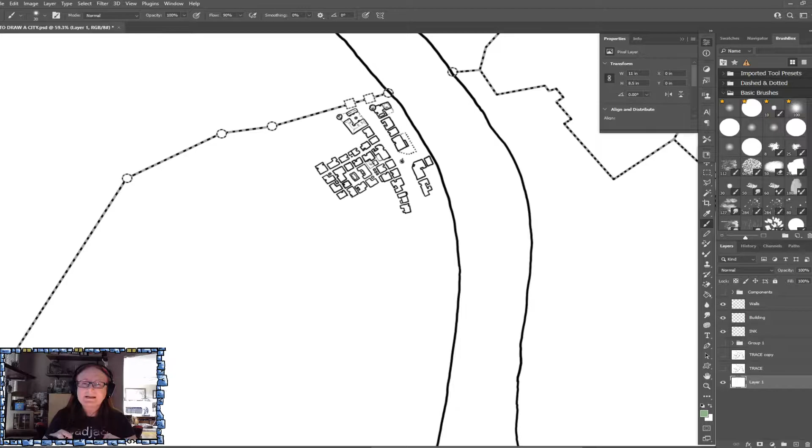And what I mean by road guidelines is something like this. Even if you're doing ink on paper, and I did for many, many years, you want to mark out where your roads are going to be. Your main roads, your secondary and your tertiary roads, right? You don't need to get every single one. You don't need to get every single alleyway. But you are giving a broad brushstroke, and think about it this way, reserving space, that negative space, for where there won't be buildings. And where there aren't buildings, there's a road, right?

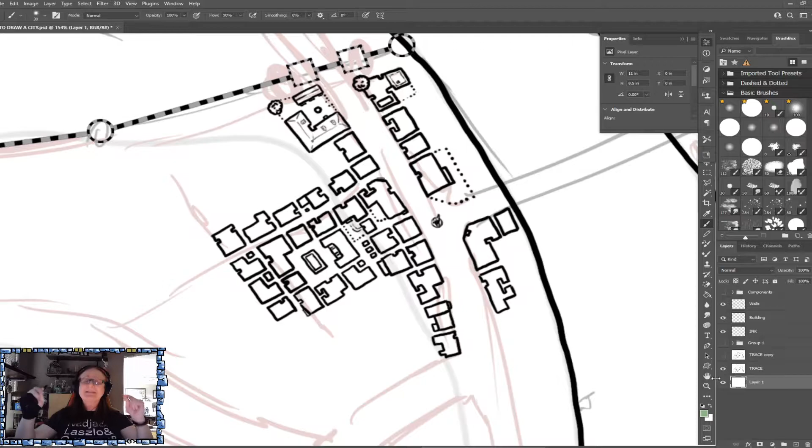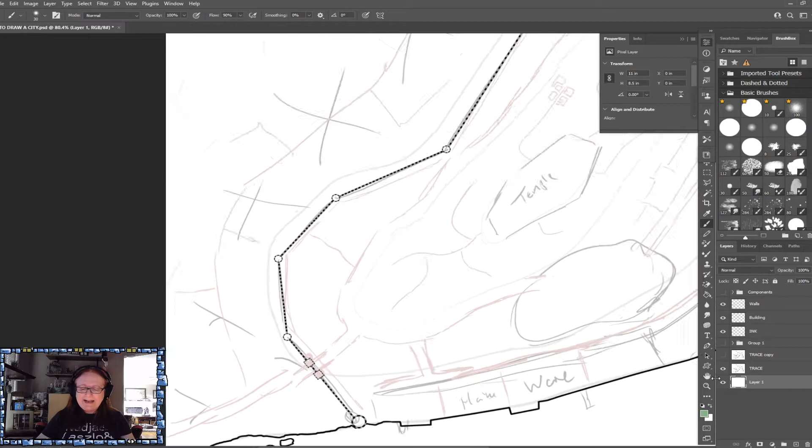And we obviously have a very clear main road coming through here, kind of following the river's edge, and then it's going to hit the warehouse area, which we're going to come back to in a moment. The warehouse area joins an actual marketplace, it then joins an inner road, let's call it like a ring road, and the outer gate there. In between the two, and it looks a little bit like a mess or a flying spaghetti monster, but I have drawn these, I'm going to call them single line neighborhood sort of districts, right?

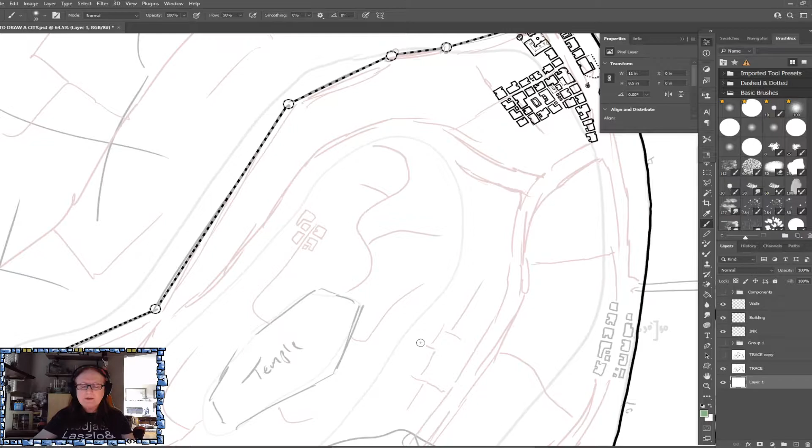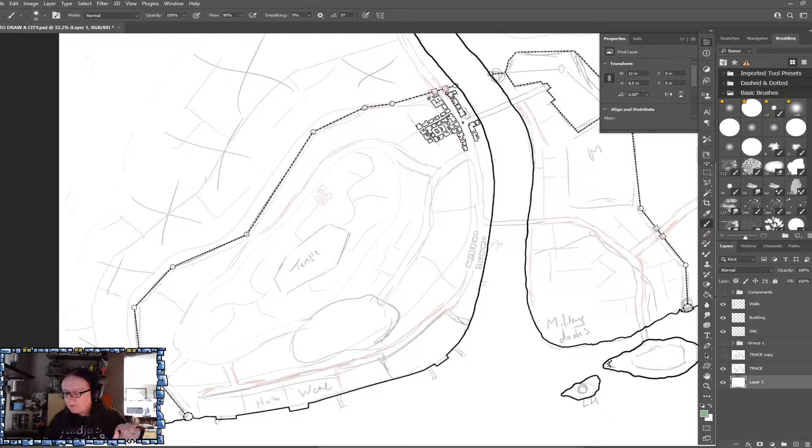And following here and here, and all of these, I'm intending to draw buildings on either side of these single lines. And by doing that, I create districts. I create clusters and neighborhoods. Let's call them clusters, building clusters. And everywhere else in between them, we've obviously got our secondary and our tertiary roads. But there are two ways of going about that. And I quickly want to share with you the second way that I used to do, honestly, for about 20 years. And brace yourself, because this is going to seem kind of crazy.

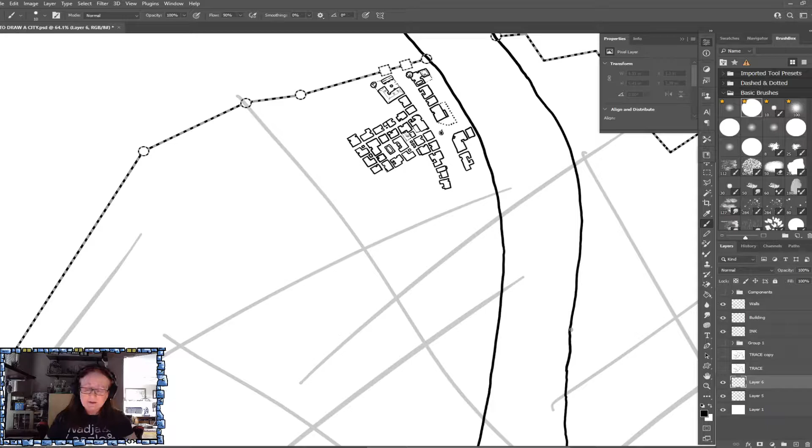Something like this. Do it with a pencil. In fact, let's change ourselves to grey so it feels more pencil-like. Where are my secondary roads going to be? That. Now that may seem utterly ridiculous. Let's drop a little opacity onto it. But look what happens if I start to draw buildings either side of that chaos. Now remember, these represent one side of the road.

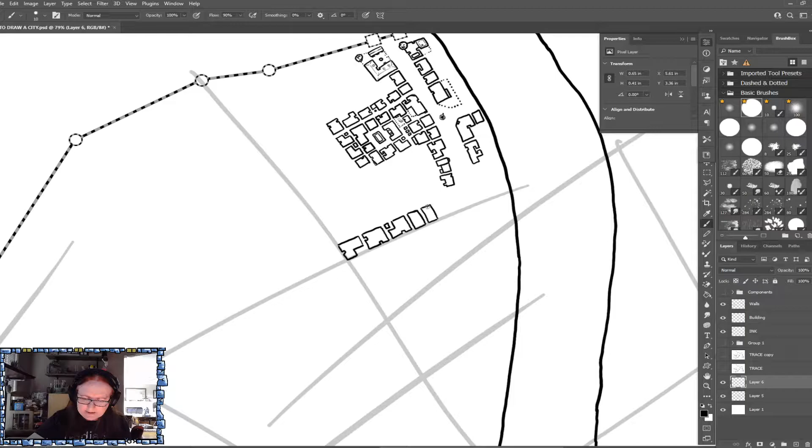Now, I'm not going to talk about shapes right now, but pay attention to the type of thing that I'm doing to create variety. So no two shapes are the same next to each other. In fact, you could even do something like this. And then a little bit of roof detail. Voila, different shape. But I'm going to flip to the other side. And I'm leaving a gap.

I love doing that little notch approach, by the way. It's a great way to take what is basically like a square or a rectangle, and then notch it. And it comes across almost like it's a little doorway or something, right? Take it one stage further. And you've just created, what, like a yard? Maybe a garden area? Opportunities for adding a little fence around the outside.

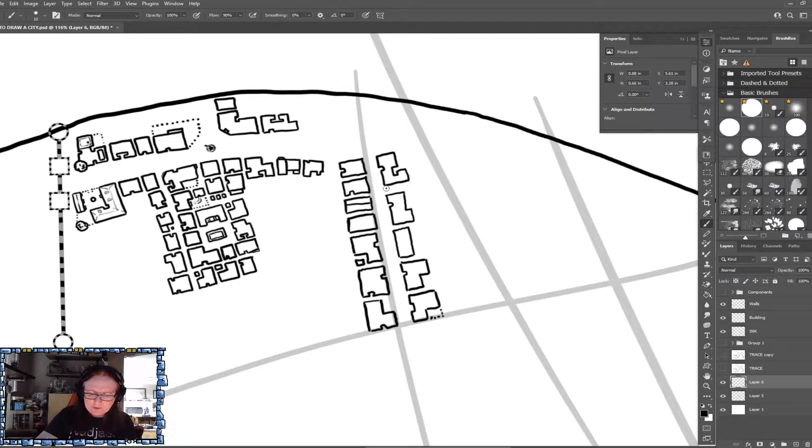Now, this is just to quickly show that drawing those really haphazard, crazy lines can give us a road edge, and therefore a city shape, just as easily, if not easier, than planning them out. In fact, let me do the intersection here. You'll see what I'm saying.

And it's almost like you could give yourself a challenge. Just throw down some random lines in random directions and go. You could do the same city with different random lines and get a completely different feel. That would actually be a cool future project. Maybe a different video, huh?

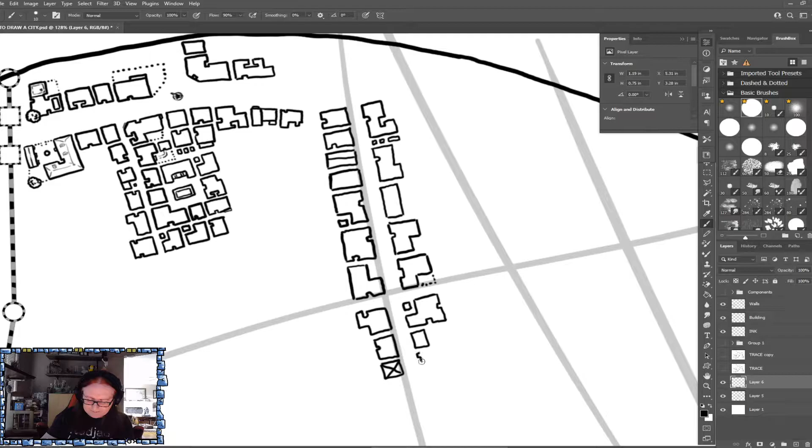Alright, I'm doing this quickly. We're going to be erasing all of this. But I just want to demonstrate that right there, just by using those crazy, crazy, random lines of chaos, we can absolutely get our districts marked out.

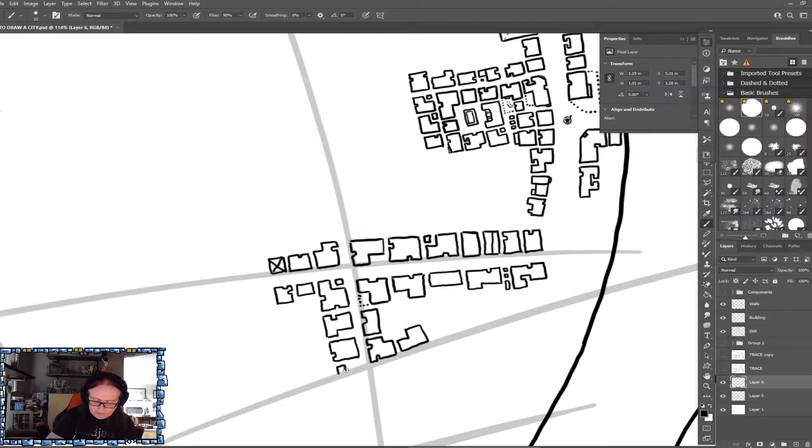And we'll do one more. I'm gonna just do something like that. And that was just some crazy, almost paint splashed across the canvas lines. I could do that all over now. Draw these buildings now all over, and it would look fine.

Particularly if we then combined that, which you should, with marking out certain areas where this is where my temple's going to be. I have a hill here, I have a palace here, I have my warehouses here. Still do those lines, just random directions, even random lengths, and you get this wonderful, wonderful, wonderful look.

Now, let's just hide them for a moment. Let's get back to our city proper. What we're doing is I marked out my main roads, and you should still do that, and I have more purposefully drawn in, well, my secondary roads, and it creates a little bit more of a thought process, but it also allows you to be a little bit more deliberate in maybe I want to take a curved path and bring it up to the top of the hill.

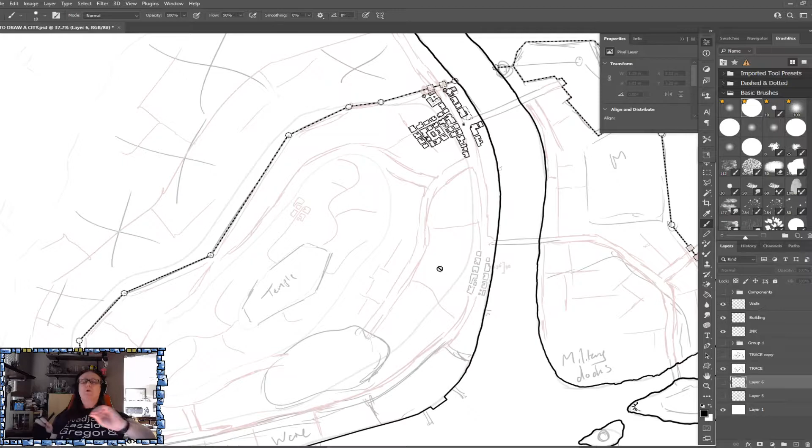I want to ensure that I am connecting between these roads over here. I want to make sure I have a secondary road over there. So it's a lot more deliberate. And therefore it actually can be a little bit more difficult because you kind of almost enter a different sort of mind state, as compared to yeah, let's draw that. But both methods work, and I've used both methods, and I encourage you to.

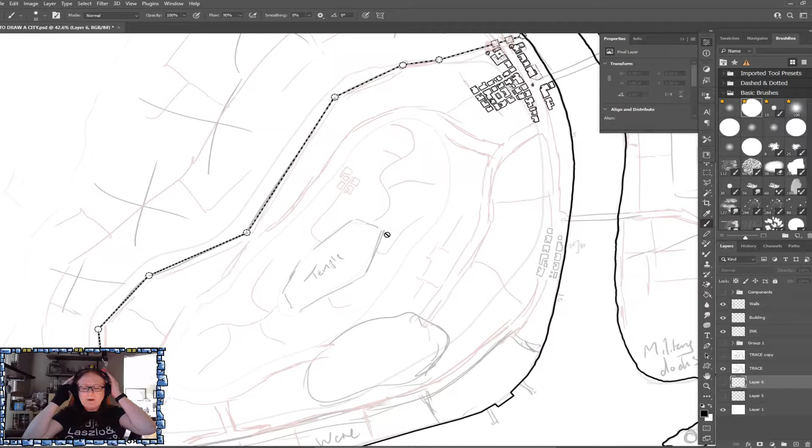You can also do a little bit of a hybrid. Mark off your main roads, mark off your main districts. If there are particular areas that you know that you want to have, and I'll use the path going up towards a temple on the top of the hill, or maybe a road going towards a palace or something, mark them off, and then do the crazy lines all over, and draw. See where it gets you, okay? I promise you, you will get some interesting district shapes, and we'll be talking more about that in a later chapter.

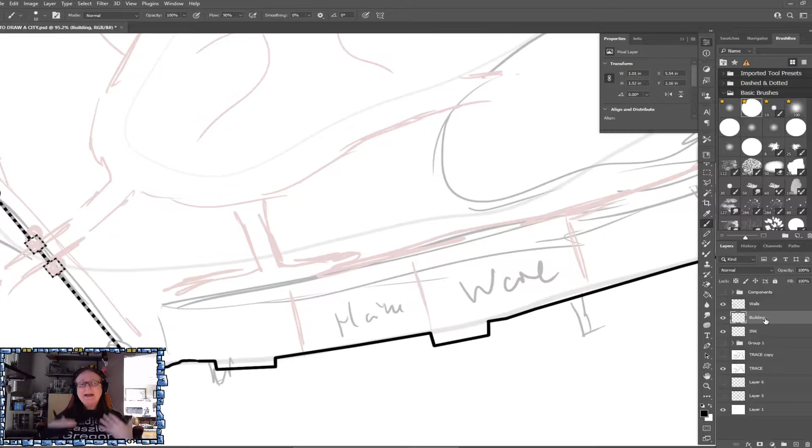First, let's come back to our building layer, and today we're going to talk about warehouses. We're going to start doing a deep dive into particular buildings and how they should differ from other buildings. And to demonstrate this, I'm actually going to do a couple of those other buildings. And we're going to talk then about how I would draw warehouses that make it very obvious. Aside from the fact that we're at some docks here, which we will be drawing in some of those, what is it about a warehouse district that makes it a warehouse district?

Well, to my mind, several things come to thought. First and foremost, obviously, the time period we're in is going to come into play. If I'm drawing in the docks of the River Thames, let's say around a gaslight sort of period, I'm going to get that almost industrial feel going on. I'm definitely going to have some cranes, that type of thing. Maybe some train yards coming in. But this is a fantasy city, so I'm going to throttle that back a little bit. But big buildings, right? Big buildings, docks, and maybe, depending, some cranes.

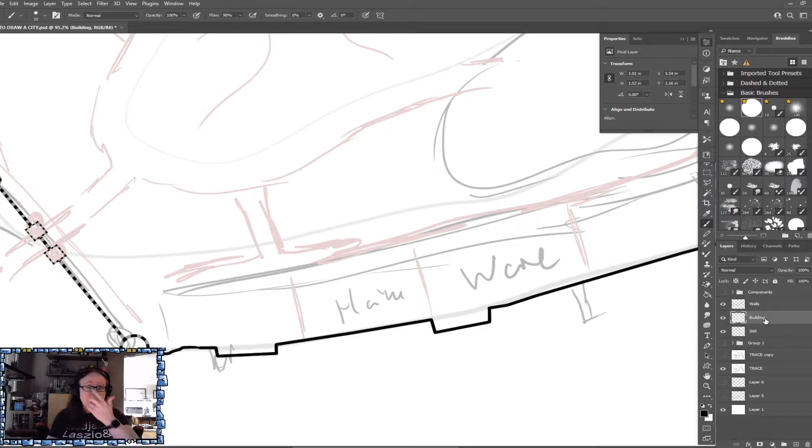Some loading and unloading cranes. So if you think about it, they had them in Roman times. Manually operated, animal operated, or whatever. They definitely had them to aid the loading and unloading process. So I kind of actually like throwing in cranes nowadays on my maps. And I think we're going to show you that.

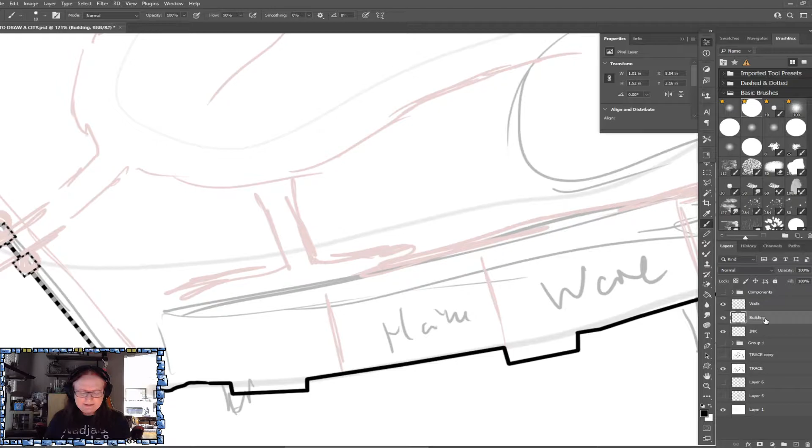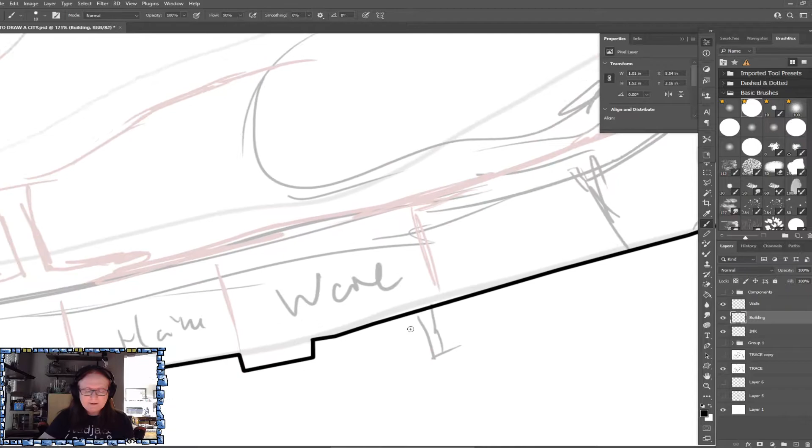But to give some context, this is one of our messy little corners, and at some point I'm actually going to clean up some of these lines where we've drawn in our towers. But I've marked our warehouse district. We know where our docks are going to be. I've already started making our little dock areas. We're going to add some piers. And I've decided that I want this road connecting with this inner road over here. So I'm actually going to draw in a couple of things there to help frame the docks that we're going to draw. What other types of things would be near docks?

Well, certainly I like to think that within a stone's throw there could be some kind of market going on. Even if it's a small market, it's the places where your fishermen come in and they're selling off the fish from the morning catch. It can be simply where the goods are now moving on deeper into the city, deeper into the empire, and where some of that initial trading is going on.

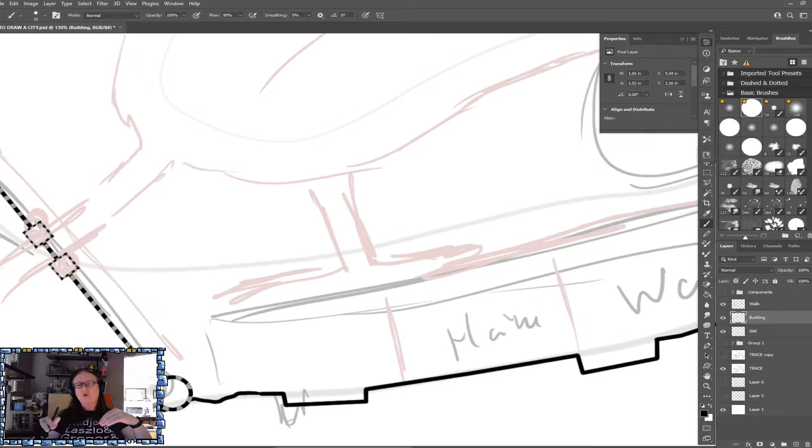We could have loading areas, unloading areas, and we might even start to get into some workshops in the area. And I like to draw, as almost secondary buildings behind the warehouses, that sense of a workshop.

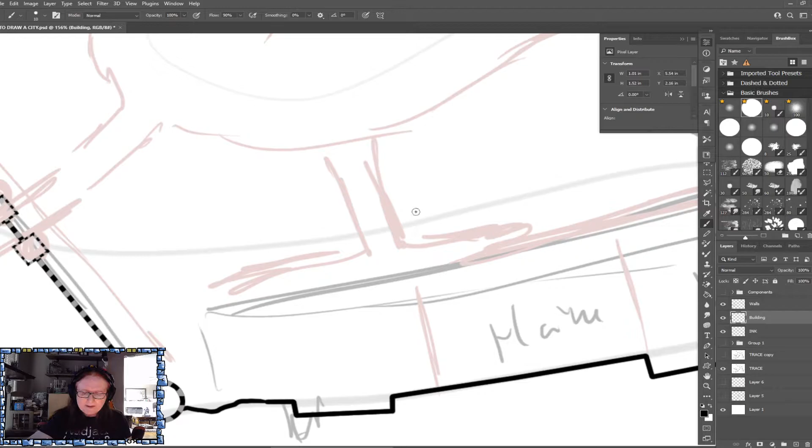By the way, as I'm talking out loud, I'm imagining myself in the city, picturing what could be there. I encourage you to do the same, because it really helps the creative process as you start putting pen on paper.

So let's draw ourselves a little warehouse, and we'll slap one down on each corner. When I say warehouse, I mean workshop. What do you think of when you see a workshop? Maybe a long building, a back workshop area, and a yard, with a front yard where they could easily move goods and materials in and out. There might be a solid front, but big gates and maybe an open courtyard on the inside. Let's draw both.

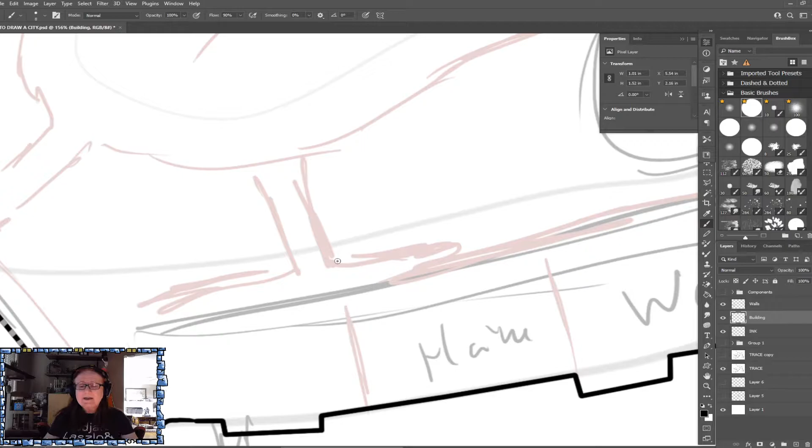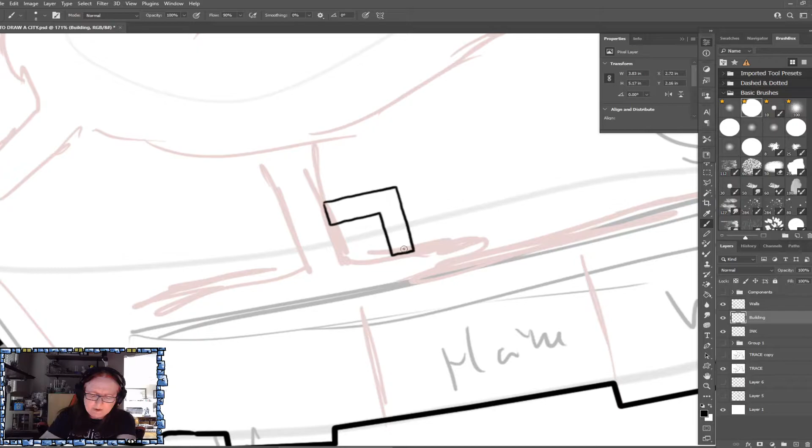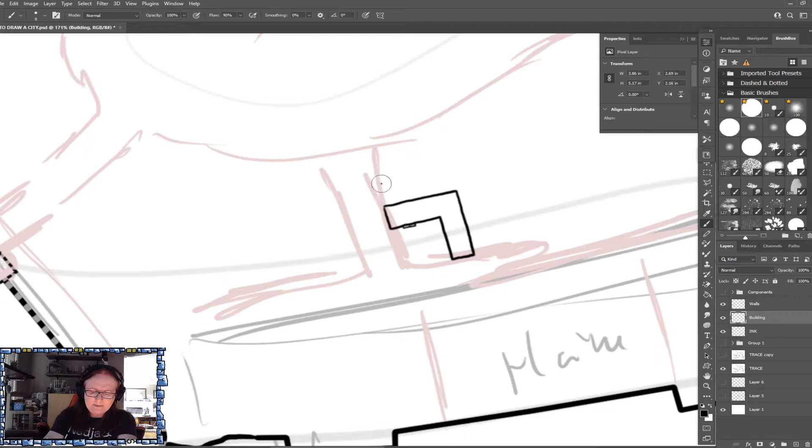Now I'm just going to do the outside shape for now, and there's two things I want you to note here. I've created the L-shaped building, that long building with maybe a workshop in front. Here, maybe we'll just create an insinuation of some doors, nice big doors at the side. I haven't done any roof detail yet, we'll come back to that. I've lined it up next to my road edge.

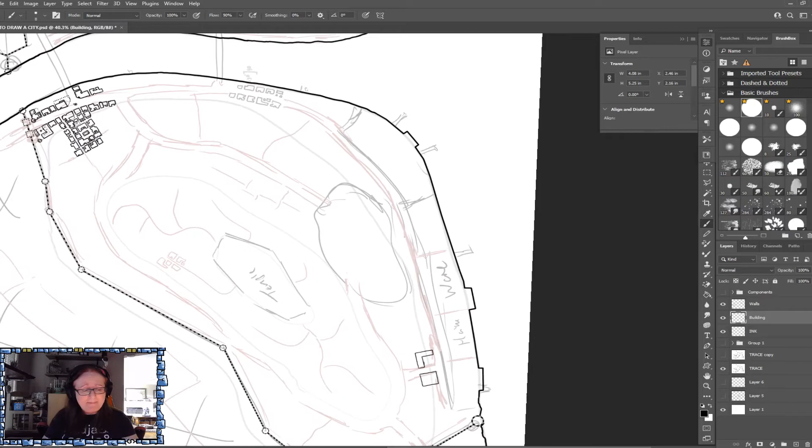If we did one on the other side, that's not finished yet, but I want to likewise line it up with my road edge. Now, two things here. These are going to be smaller than the warehouses, but bigger than my buildings on the other side. They're quite a bit bigger, because they're workshops, not a place where someone lives, well maybe they do, but you know what I mean. It's like a bigger building, maybe the size of 4 buildings.

Now you have a choice when it comes to an outer barrier here. I say barrier because it might be a fence, a wall, or an iron rail. I tend to approach them the same way, here's why. If I draw a solid line here, which you can totally do, it can start to look like it's part of the building, particularly when zoomed out, and you start to lose the definition that there's actually a workshop back there.

To help with that, cut a hole in the front. That could be a gate. If you actually drew in the gate, you lose the effect. If I'm going to do a gate, I tend to draw it open, because now it's obviously some kind of gate. The alternative is to put a couple of pillars on the front, it's an opening. In reality, when you write up this actual location in whatever you're GMing, this could easily be the opening with a gate to a courtyard, but you don't have to draw the gate itself. For variety, do some with, some without.

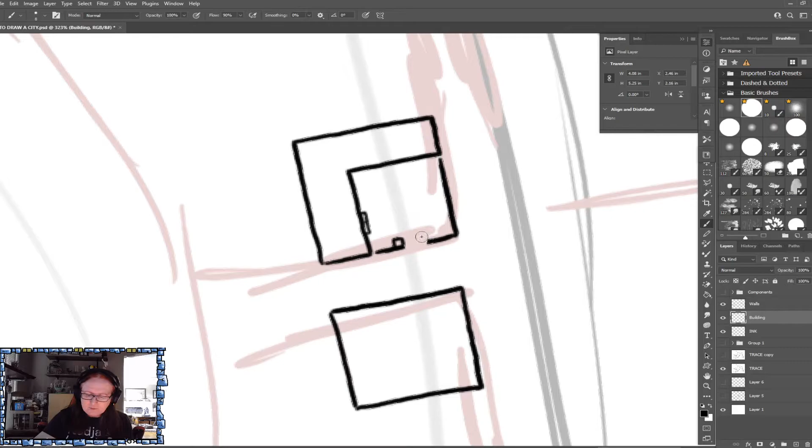I like this. There's another technique you can do: draw actual physical blocks on the end. What is that? Still a gate. It could be a gate with big thick pillars either side. It could also be little guardhouses, where maybe there's a watchman standing there checking everyone in and out. And on that note, you could take it one stage further and mix and match a little bit. I'm actually going to go with that route, and maybe give them a little door on the other side.

Doors, by the way, you don't have to draw every single door. Don't draw every door. Doors are one of those little tricks you put in your back pocket. It's detail, like roof details and side details. A notch in, a door is almost like a notch out. It's one way to make this building different than the buildings around it. If you give every single one a door, you lose that ability to have variation.

So keep it in your pocket, just like you would with the roof. Now, also here, if I did this, that gives a sense that I'm looking at 3 almost loading doors right there, and that's good, I'm okay with that. There are other ways of doing it, you could do it more like maybe just leave it open, or you could even do recesses. I like this too, that looks more like loading docks. I think that's a good look.

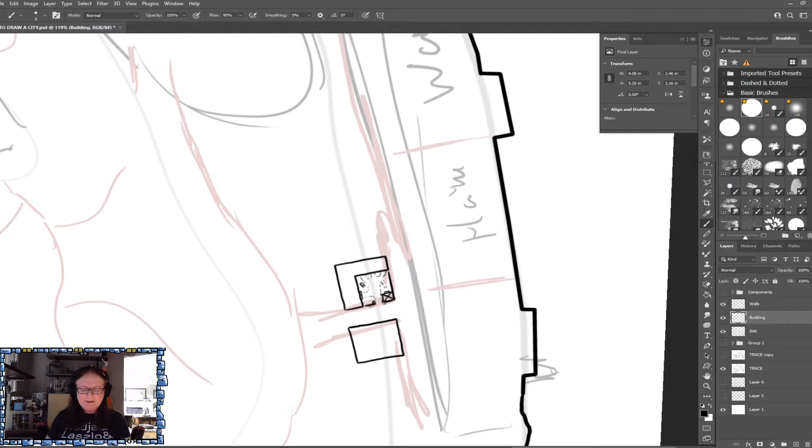Now, here's the thing. As we get into the warehouse district, I'm going to recommend that you start to add some roof details more than you typically would. There's various different ways that we can do that.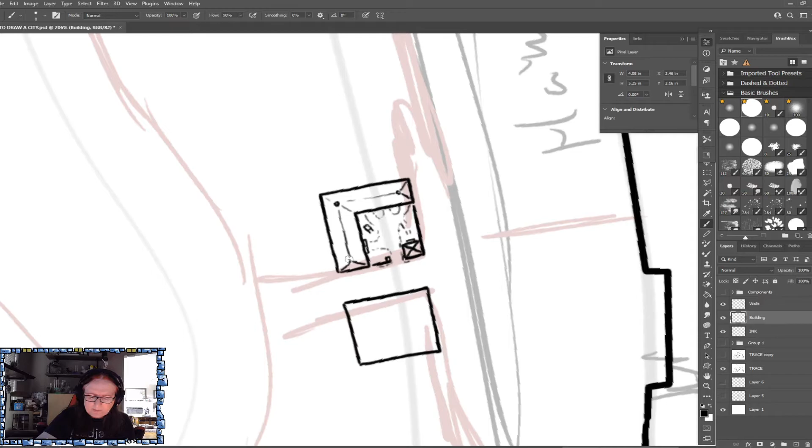With something like a workshop, I do feel it will have our regular roof shape. We'll bring it down like so, kind of like this. I don't want to make the line too heavy, like the outside wall. If we did something like this, we have a lovely roof. That looks great, I'm happy with it. We're going to move on.

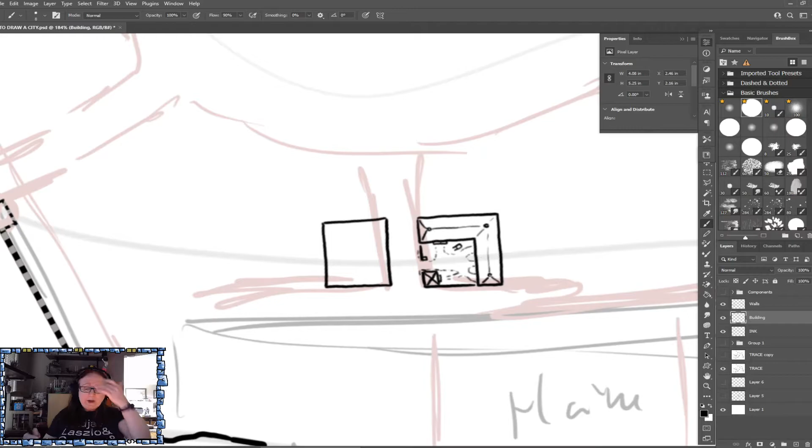But it doesn't look like a warehouse, right? Because of the yard at the front, because it's a little bit smaller, because of the shape of it, it feels more like a workshop-like area. Maybe an area where they're storing or moving some goods, but not on a mass level.

So that's cool. What's going on with the area opposite it? Well, the reason I drew this is you can make a simple block like this way more interesting by giving it a courtyard, like so.

And if we put a bit of roof right here, something like so, maybe we'll give it a bit of this. Now I'm actually drawing the roof on because I want the courtyard down below to stand out. I'm going to cut out the front, notch it in to imply there's a large entryway that you go in.

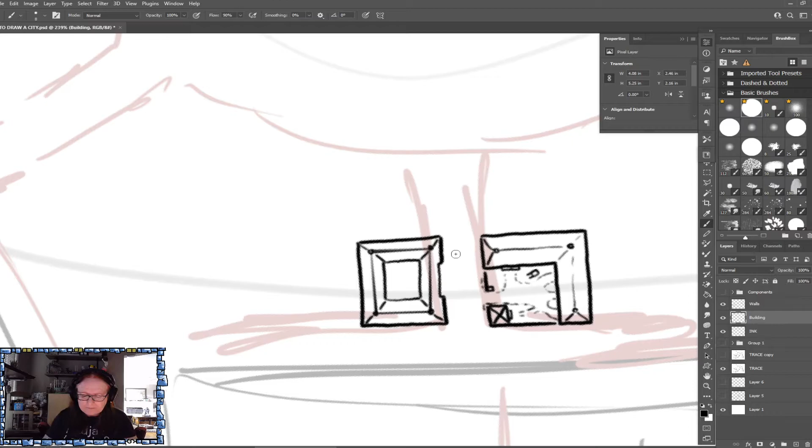And then in the courtyard in the center there, you can totally leave it blank. We're going to color it later on. There's ways of making that very interesting, but you can also do the same little path approach.

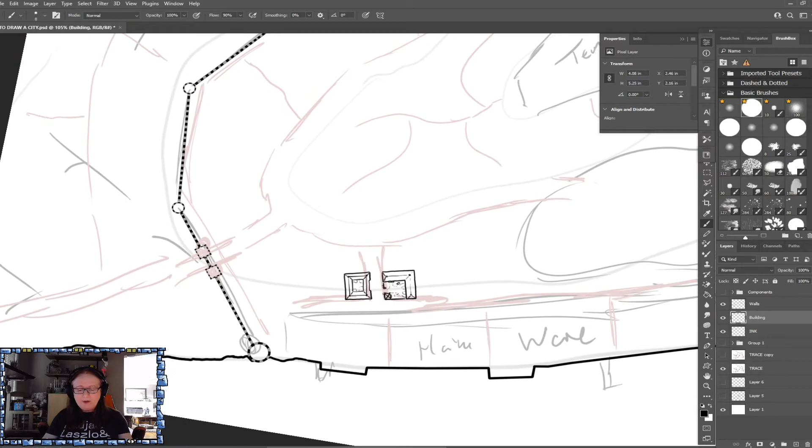to imply that there's some traffic coming and going. And when we color that later, it will really pop out. You can see that looks like a square of buildings with an open inner courtyard, a large entrance to it. Well, what if we did this?

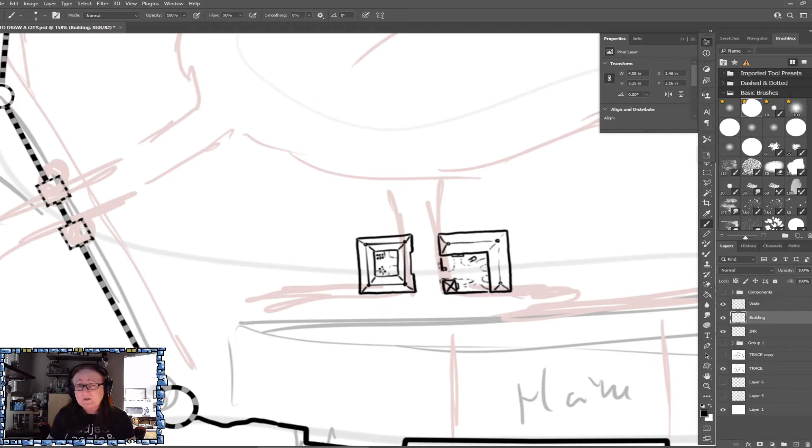Well, maybe they've got some goods stacked up in the courtyard right there. Just little dots, that's all you've got to do.

Now, why did I start with the workshops? Because I wanted you to see what that looks like before we actually start drawing the main warehouses themselves. Let's spend about 20 minutes into this. Let's see if we can get a warehouse done, and then we'll continue this in the next chapter.

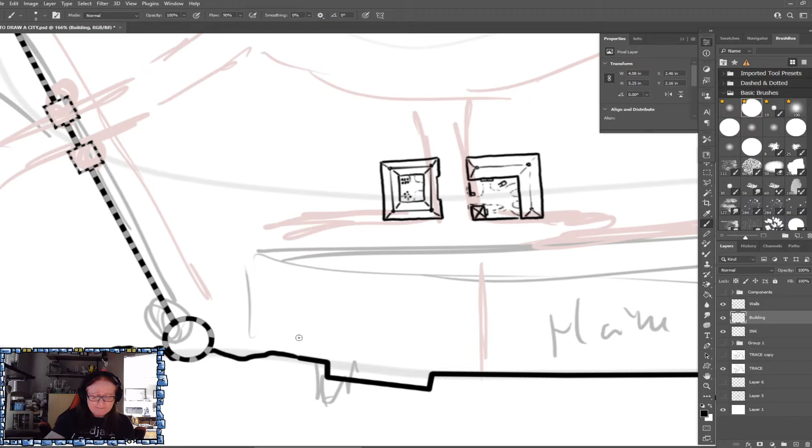So we're going to draw a warehouse here now. I'm going to follow our edges. I'm going to leave a gap between the warehouses so it's not too boxy, a gap between the warehouse and the workshops back here, and a gap along the main harbour itself, right? That's where they're moving goods after all. First and foremost,

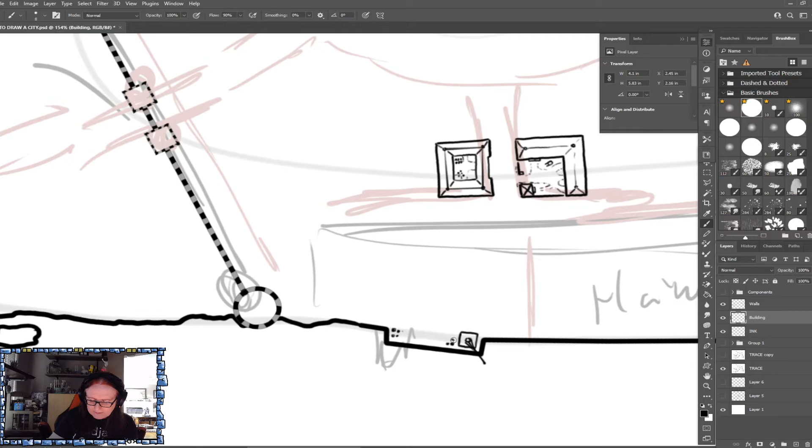let's just give ourselves an insinuation of a little crane, a loading and unloading apparatus. Additionally, we've got some goods. Maybe we'll go one stage further. A little cart. Now let's do the warehouse.

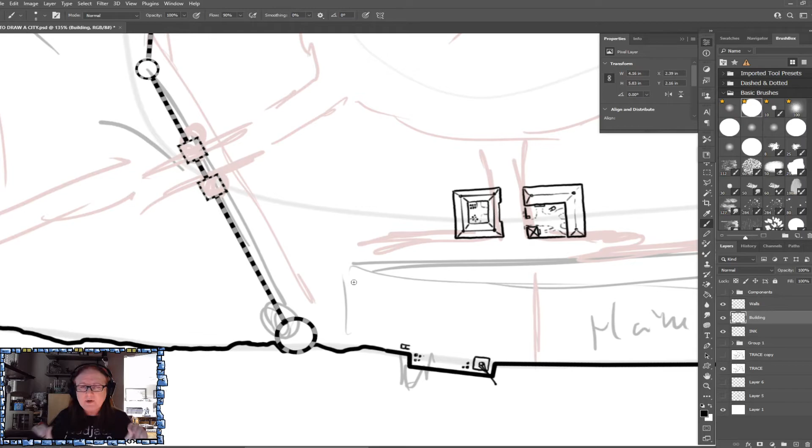So I'm going to start over here, and we're going to go big, baby. We're literally going to go big. We're going to do something like this, and you know what, let's step in from this one. So we'll do something like this. You'll note I'm not following this line — I kind of want it to have a nice little bend there that will make it visually interesting.

I'm actually going to bring that warehouse in to here. And on the back, you know what we're going to do on the back here? Because I do want it to meet that road, I'm going to wall it in — I'm going to wall it in with a fence, and there isn't going to be an opening.

You can almost imagine going down that road, you can see this big warehouse on your left. Iron fence, maybe on top of a wall, stacked with goods. Now, I'm actually adding some details a little ahead of time, but again, I'd like to throw in a little cart, other types of goods.

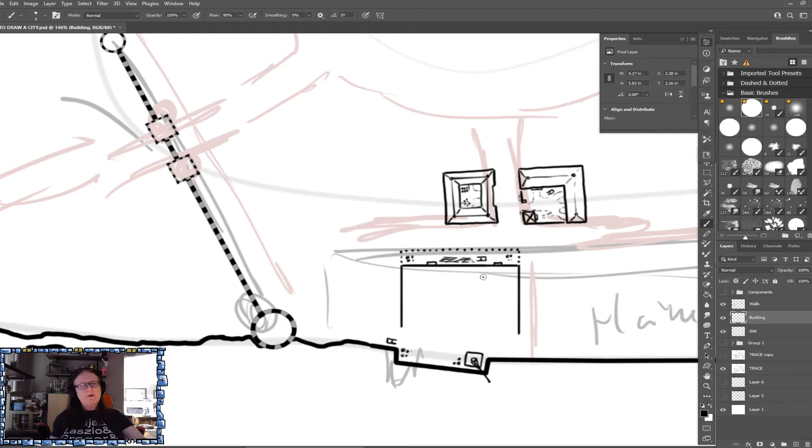I'm just drawing lines here, but it looks like I've got stacked timber or something going on, right? This is now an area that's got some life to it. This is not an unused area anymore. Look at this little synergy going on between them.

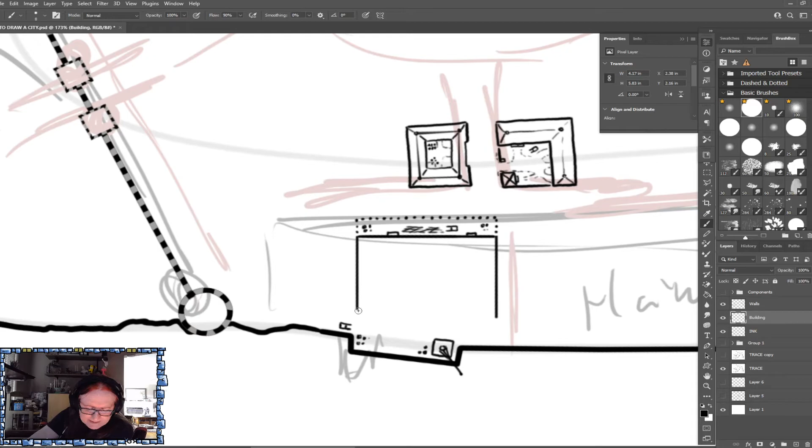Okay, so now let's do the front. There are so many different ways we can do warehouses. I think we're going to do an episode just on warehouse shapes alone. But for this one, I'm going to recommend something like this. Let's follow the shape here, and I'll show you how we can get this very weird angle to the front to be a little bit more natural. I like that it's following the front of the actual harbour itself, but I don't like that it creates this off rectangle, and I also don't want to destroy it entirely.

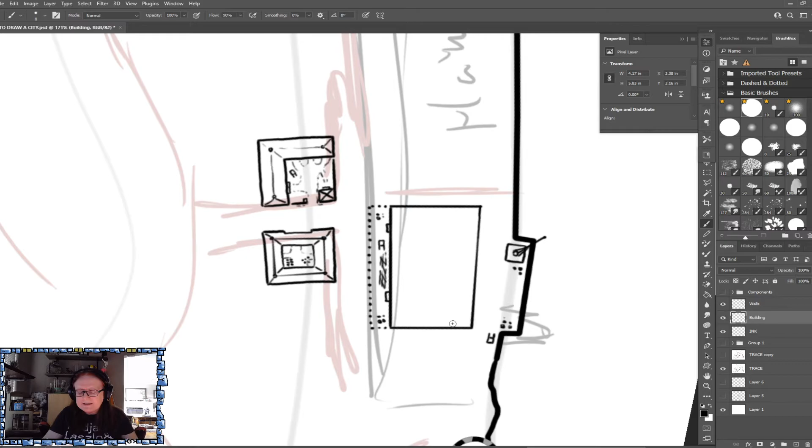So you know what I'm going to do? I still have a rectangle there, but I've broken up the fact that it was... what is it, a trapezoid or something, where it's slightly not a rectangle? That's technical.

And this is now my main loading area coming in and out. So I'm going to make sure I've got lots of goods in here so we know that it's my main loading area.

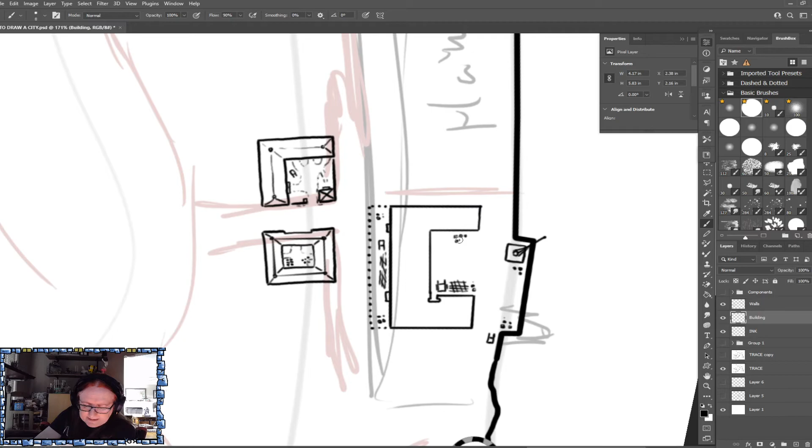Let's stack up some crates here. Let's get a cart. Let's stack up some goods here. And again, I'm going to give it a very big entrance, and I'm going to do this type of thing.

Now I'm actually going to put some roof detail on this. Warehouses can have all sorts of different weird and wonderful roofs. But first and foremost, I'm going to give it a little bit of a ladder coming up the side, a stairway.

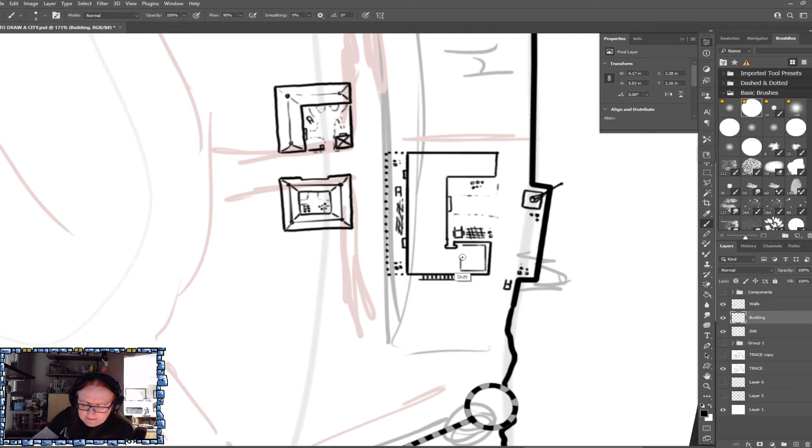I can almost imagine now PCs planning on getting on the roof. Talking of which, let's give it a raised roof right here. Something like that. Now I'm imagining this is actually a flat roof on top, but not all of it. I'm going to do this.

Another roof on top. Let's make this one raised. Let's bring it down like that. Now I'm imagining that this is all sunken down here a little bit, but it's a flat roof.

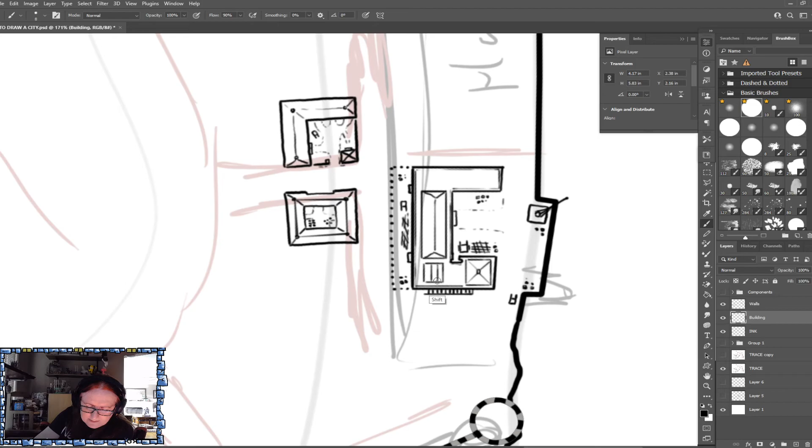What great opportunities for actually getting a little bit of an adventure on the top here, right? I can imagine the NPCs or the PCs coming up onto the top, sneaking up here, maybe looking down through a glass ceiling right there.

There is the start of our warehouse district. And I don't know about you, but I'm already digging that. I am already beginning to feel it.

Rules for this chapter: you're drawing bigger. Place yourself right there. What do you see in your mind's eye? Draw it.

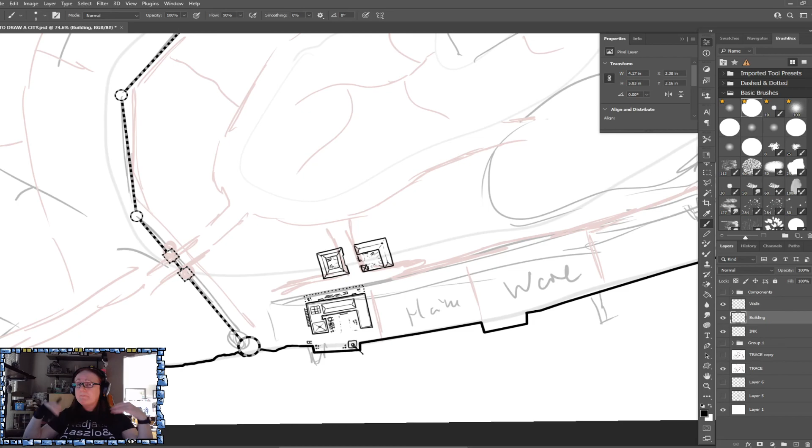Docks - we're going to have docks. We're going to have piers. We're going to have cranes. We're going to have goods. We're going to have big warehouses. And then workshops and things like that behind them before we start falling back into the main city itself. That's what I'm beginning to build here.

We are going to continue in the next chapter walking along the dock area, filling in different types of warehouses. And I'm going to show you dozens of different ways of approaching not only warehouse shapes, but warehouse roofs themselves.